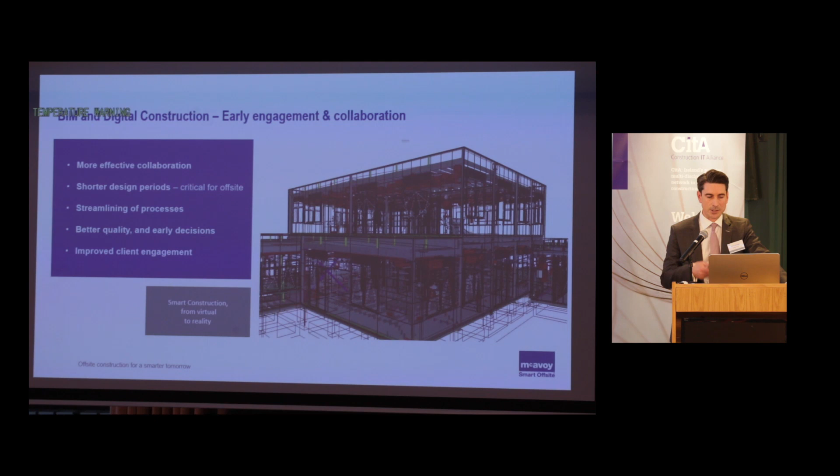Some may see that as a disadvantage. There's a lack of flexibility there. Others may see that as certainty in terms of programme and cost. Streamlining of processes, not only between client and contractor, but also internally within the business in terms of delivering the project quickly and effectively, and improved client engagement. And I'll talk a little bit more about that later on.

So the VR piece, really innovative, really fun. Dag mentioned fun a couple of times in his presentation, and that level of engagement we get with our clients based on VR is invaluable. Especially building schools, where our stakeholders typically are bursars and school principals and heads of trust. They don't understand 2D drawings.

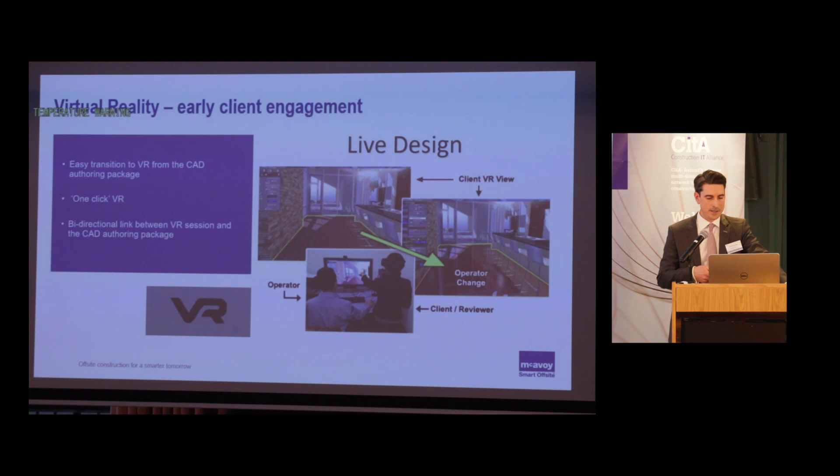So the 3D VR allows a real interactive, totally immersive experience and helps people to visualize the buildings that we're going to build for them. We've experimented in a number of ways, beyond just having a VR hub in the factory where people come and put the headset on. We're looking at it from a practical point of view and also from a project delivery point of view.

So we've trialled this multi-user VR on a particular scheme recently, a large school project in London, where all of the stakeholders, all of the actors, rather than us putting bunches of people on planes every Monday morning and flying design teams and project teams over and back through the detailed design stage, we can do it from a virtual environment where all of the actors have their headsets on and we can make real-time design changes to the project.

We use it for staff training. We do a lot of inherently risky processes in terms of our manufacturing, lifting heavy components and pieces of steel and shipping and logistics and so on. So we can do a lot of this training using VR, which again is a fun thing.

This is very exciting. This is the next stage, taking VR and BIM to the next level from a production point of view. Again, Dag mentioned it with the, I don't know what photographers are going to do in the future when the classic PR photograph was somebody holding a big A1 drawing and pointing at a line drawing. Now it's iPads and you've already shown that. So this augmented reality is going to become more prevalent in our business.

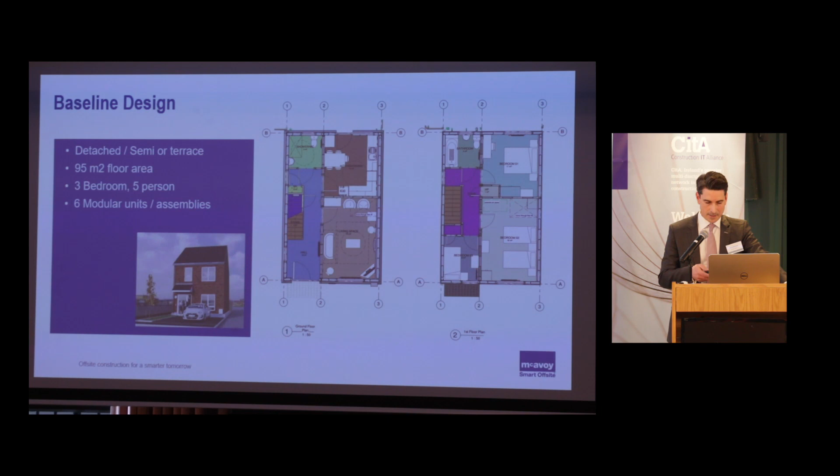So there's the model of the light gauge steel frame structure. That's it when it came into the factory. Dermot Healy from Curtins saw this firsthand, shook his head and a sharp intake of breath and said, "That's over-designed." And he was right, because it was a prototype. We have since, you'd be pleased to know, rationalised that a little bit, taken some cost out of it and innovated the system. So currently it comes in from the UK on the left-hand side as a pack, and we then erect it like so.

The investment in the new factory in England, which I referenced earlier on, we will roll our own. We will have cutting, and we will have beds, we will have systems where the galvanised steel will come in, and we will roll our own, just to, again, straight to line. There's the prototype in the factory, kind of a surreal experience at the time, walking around it when there's 150 men doing their work outside. But again, certification, light gauge steel frame, because that's what we do. So we use BIM clearly to develop the design for the prototype, help us to engage with the client, and to make changes to the layout quickly and simply.

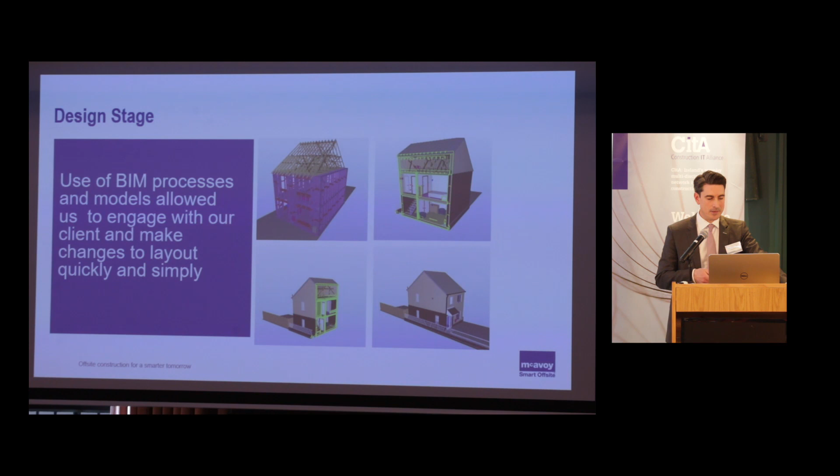The physical prototype actually acts as a great advertisement. It's something we'll more than likely put in the Irish Innovation Park if we get there, and I'm confident that we will. We've redefined the term moving house because that prototype has actually been moved 4 times. It's been moved twice in the factory, went to the site for the PR for Clanmil, and it now has its not quite final resting place in our Lisburn factory, because I hope to sell it at some stage. But I think Alan and Barry can testify that you wouldn't know that it had been moved 4 times. And it is a distinctly underwhelming experience, I have to say.

Anybody's very welcome to come up and have a look at this. I have a key. The weekend's party I had has all been cleared up.

But as I say, it's underwhelming because people, they don't know what to expect. The words prefab and modular, 2 words we've taken out of our lexicon, I might add. We talk about offsite construction. We've trade registered the word smart offsite because the words modular and prefab have such negative connotations, and I'm going straight to HR, Sean, to ask them to put an ad out for an offsite psychologist or whatever that role is. He'll be worth his weight in gold. Yeah, look, it looks like a house, it feels like a house, and it sounds like a house because it's a house.

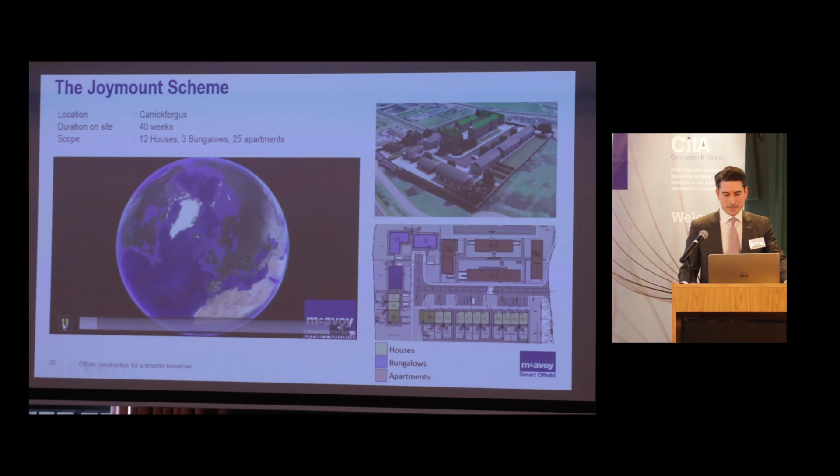So anybody who's been to Carrickfergus, it's a lovely place geographically. It has its social problems. We're hoping that this will help to mitigate some of those. So you're not far away from a 1,000-year-old Norman castle there. You're right on Belfast Lough. It's prime real estate. Unfortunately, it wasn't that prime when we started digging holes in the ground. It was full of asbestos, but that's the world in which we live.

This is a piece by BBC Newsline.

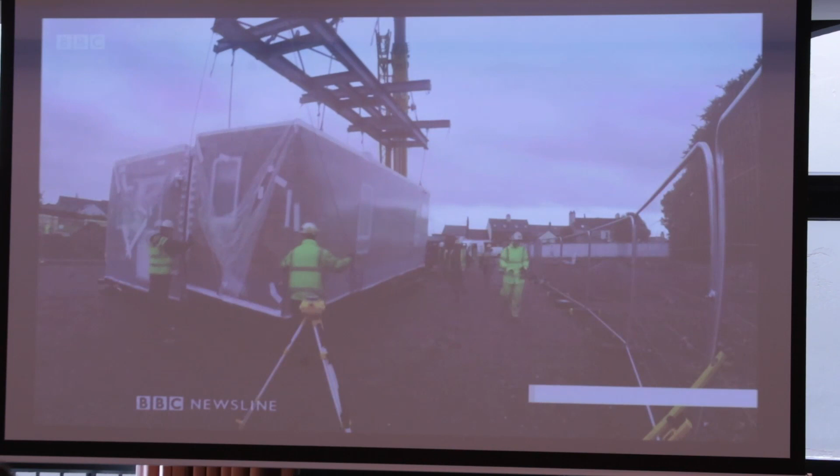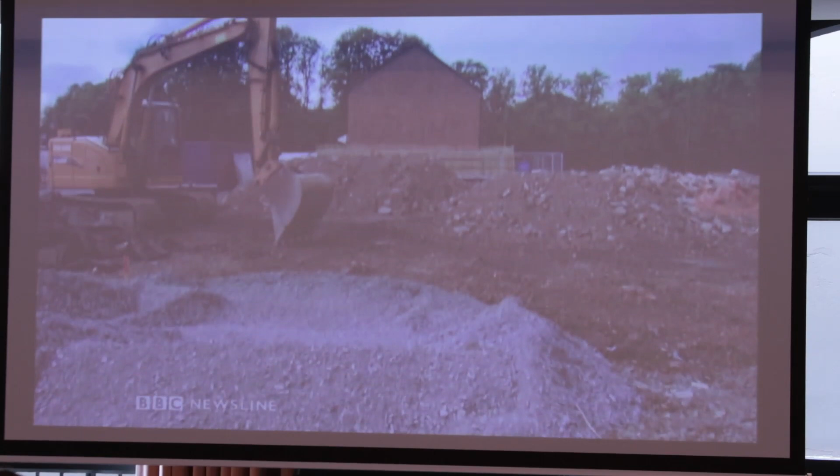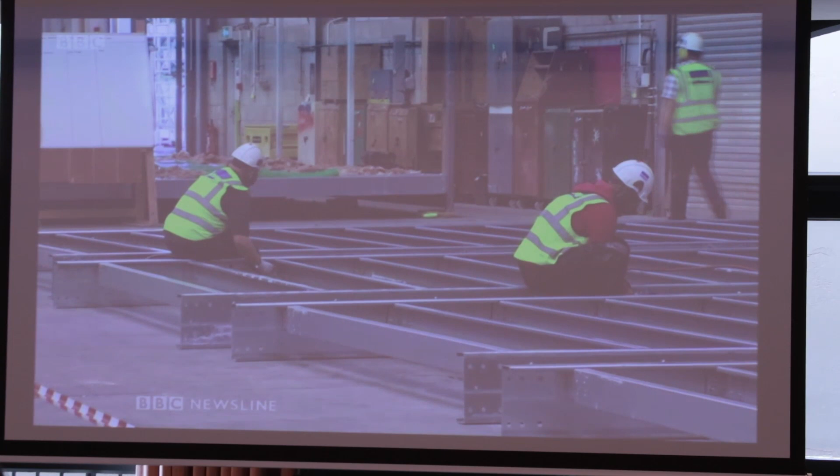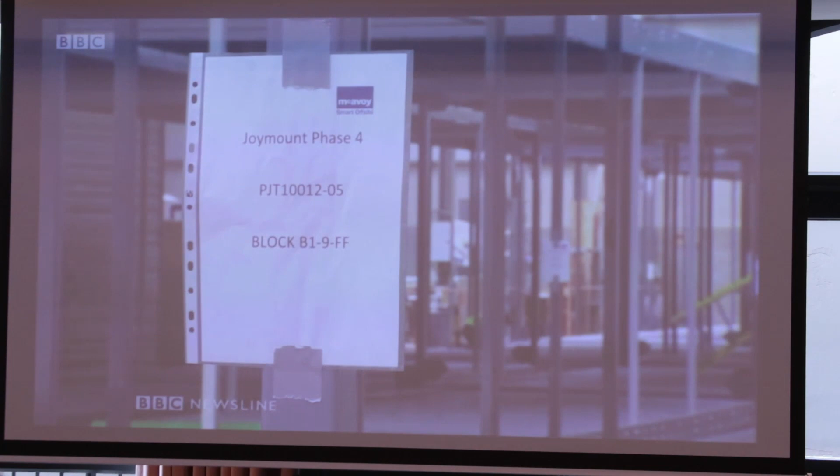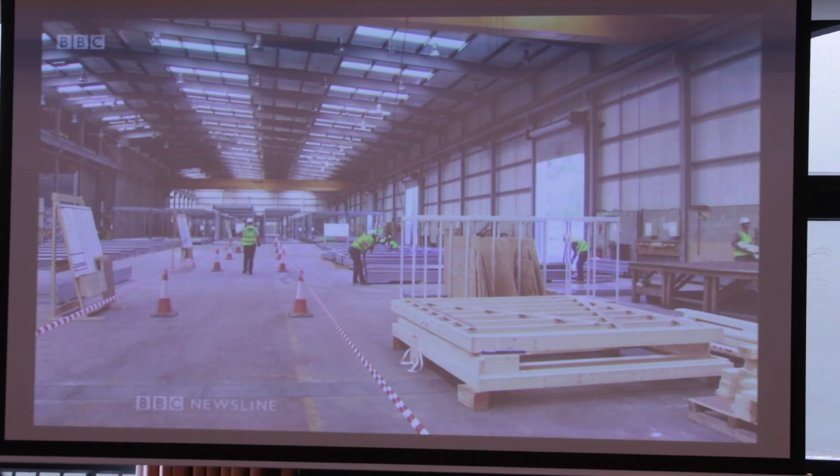Some housing organisations in Britain already do things this way and see speed of delivery as key to addressing growing demands for rental housing. We have a major housing crisis. If we're ever to meet that and fill the gap, we're going to have to build much more quickly than we're doing. And modular is going to be absolutely essential for that. The company making the houses already uses similar techniques in the commercial sector. Our houses are built to the same building regulations and legal requirements as any house built, what you might call traditional or on-site. The project will take months to do instead of well over a year, and once the site is prepared and the houses manufactured, they can be assembled in a day. This is not a new way of building things, but it is a novel approach when it comes to social housing in Northern Ireland. Ultimately, this project will deliver 40 new homes in about 9 months' time, twice as quick as if they had been built the old-fashioned way. Julian O'Neill, BBC Newsline, Carrickfergus.

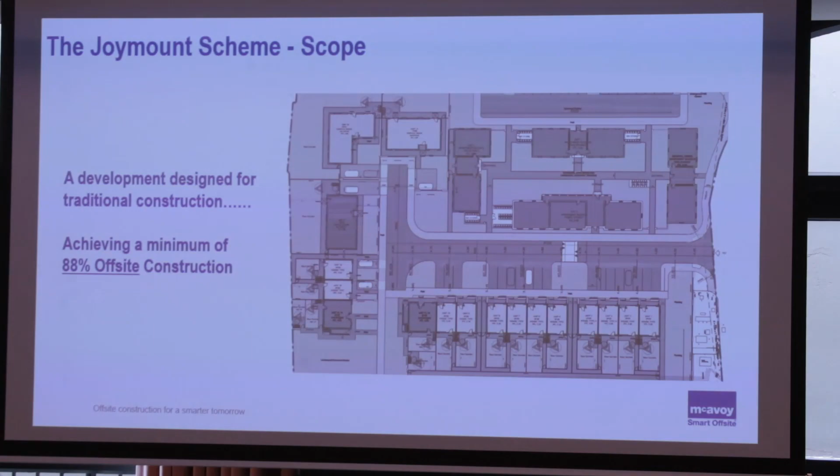I think Clanmill need to hire our PR consultant, because whilst that was Clanmill's piece, they didn't get an awful lot of it. We got a lot of subliminal branding there. But a really objective piece, I should say, and it generated an awful lot of interest. And I think what it did for us as a business was help define who our customer base actually is, or we would like it to be. We've got a lot of small developers with 20, 30, 40 units coming to the door asking, how cheap is it? That was the only thing they were interested in.

And when we extrapolated out that scenario to say, right, fine, you like the product, you like the price, I build them all for you in 4 months and you pay for them all. Well, how does that sit? Well, we only build and sell one a week. So it didn't work for them financially. So the proposition has to be right. The market requirement is different depending on the subsector. So volume is key for the industry. Standardisation is key. Are housing associations right? Again, procurement is also one of the fundamental things we need to consider.

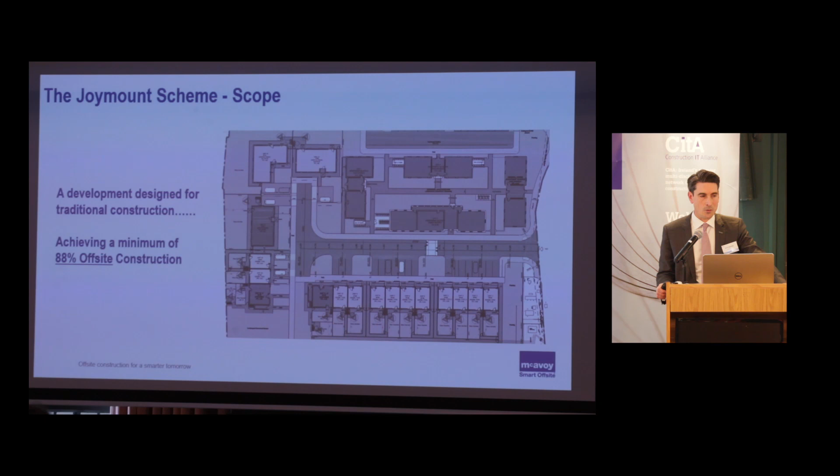If we talk a little about that Clanmill process, we tendered it. We were 20% more expensive than the traditional contractor, but we knew that the outturn costs were never the tender costs in normal procurement of social houses in Northern Ireland. Clanmill recognised that because anecdotally they had just awarded a contractor a price based on his lowest price, a race to the bottom, and within 3 months they had 127 compensation events on their desk. So that's just not conducive to working collaboratively, and surely not good value for the public purse.

Clanmill: initially we thought 88% offsite, light gauge steel frame, and we thought the balance would be reinforced concrete, because it's circulation within apartments. But we've since innovated, and the whole thing is now offsite.

So a little bit about what won it for us, if you like. Compare the two processes, traditional versus offsite. Design's the same. There's no advantage in terms of design, because we still need to employ all the same experts, acoustic and fire and structural and architectural. That detailed design work is incredibly important, clearly, because we need to hit the ground running, get the materials ordered for the factory and start manufacturing.

This is where the benefit really kicks in, because we can do a lot of things simultaneously. So site works are happening at the same time as we're building. We can then phase the deliveries and overlap a number of key tasks, which delivers us a 60% time saving in terms of the overall project. So that was what was very appealing to Clanmill. Not only would they realise revenue much earlier in the cycle than traditional, but they were also ticking one of their social charters, which was getting people into new homes.

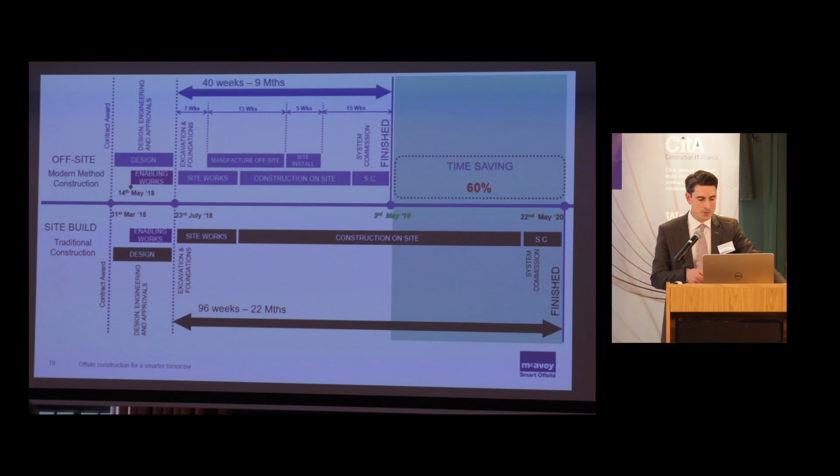So using the same system, the same light gauge steel frame 2-block system, and we're at the early stages of this, developing standardisation, a common platform, to use the BMW parlance, the CLAR system, where 80% of the components in a 1 Series are exactly the same as they are in a 7 Series. So we have a long way to go, but the process is starting. It's the only way our industry is going to be able to deliver and continue to reduce costs.

I think the general comment is that it's too expensive still currently, and there is a bit of a premium to pay. And it's incumbent on us as an industry, because I think the capacity is not quite there yet, to increase capacity, increase investment in capital and buildings and investment in technology in order to widen the options for purchase.

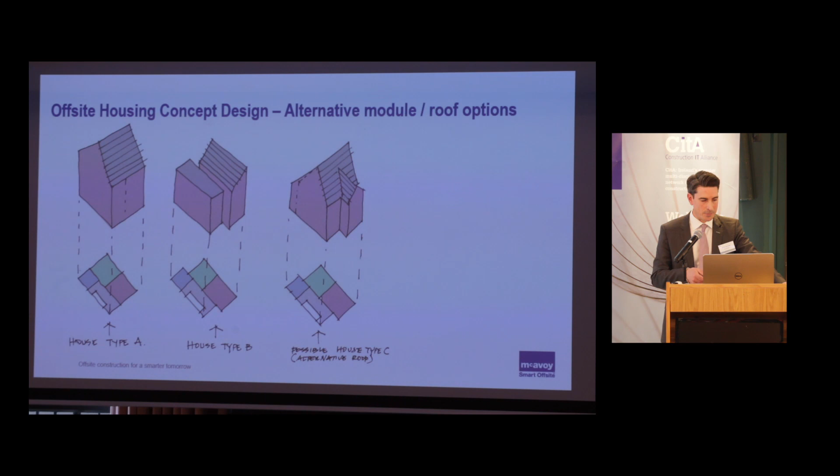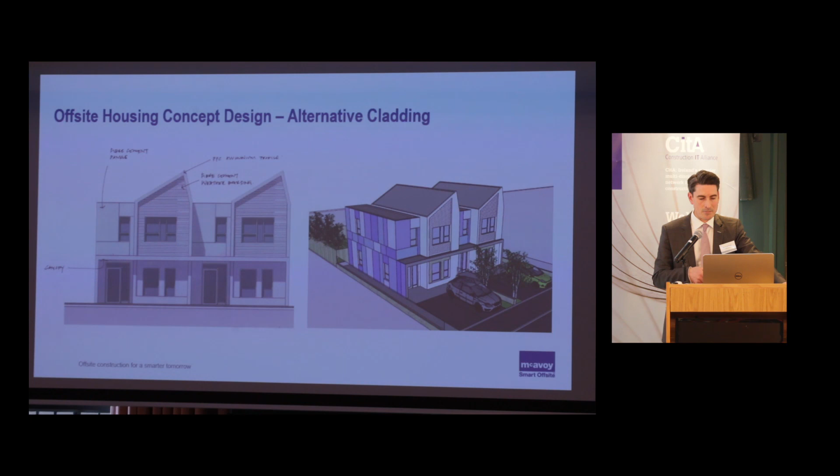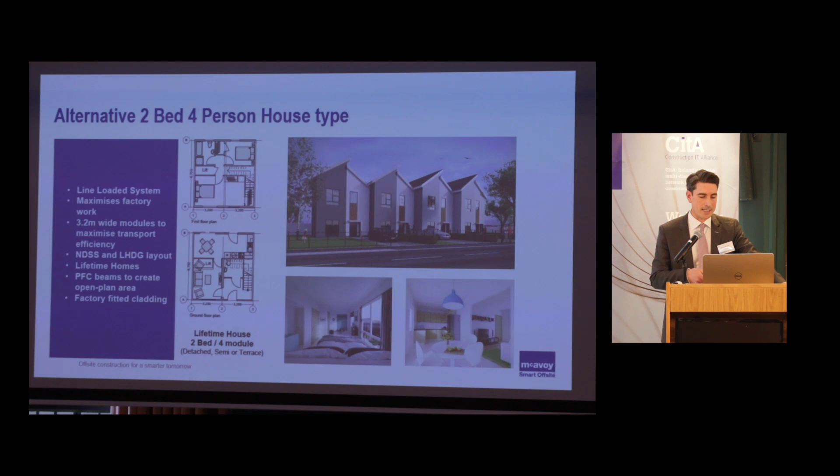So here's a number of different concept designs. Again, all using the same DNA, can look very contemporary, change the elevations, change the roof type, change the design, and you get some markedly different types of buildings. 2-bed and 3-bed, again, same system, just slightly reduced in size. We're working currently up to 18 metres for one type of system. Then obviously the new regulations, non-combustible materials above 18 metres, take us up to above 7 stories. Again, that's another system that we're currently developing in terms of design.

Mid-rise apartments. I think in Dublin the general appetite is for much larger scale build to rent and PRS, and that's where we see the opportunity for offsite really delivering some value. But again, the challenge is scaling up and having the capacity to deliver, because you've got the procurement paradox, where you've got the client saying, I need assurance of supply, and then us on the other side going, we need assurance of demand. How do you get those two to trust one another and to talk together and to actually come up with a plan to deliver? So capacity is the issue.

I know one particular developer has nearly 13,000 units in his pipeline, and construction inflation in Dublin is currently 7% a year. You cannot get trades, and clearly in principle offsite works, but it's whether or not practically and from a capacity point of view we can actually deliver to those levels of expectation. Again, working on the standardisation of systems and components, repetition floor after floor after floor. Dermot Healy's done a lot of good work on this for Dublin City Council, where he understood the importance of that repetition floor by floor, so that we're not spending additional monies on hot rolled steel and different structural systems.

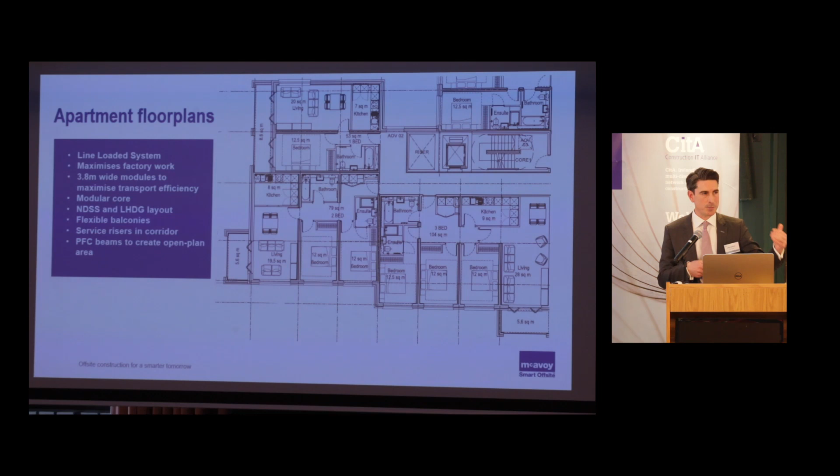So just to finish then, the benefits of the offsite solution: increased collaboration, and it's fundamental, and I'm going to reiterate it again in terms of the maturity and the insight shown by some UK government departments, where they're working collaboratively with us. They're showing us a pipeline, they're helping us to invest in the product in order to gain advantage and in order to deliver them more schools on time.

Standardisation is key. We're less dependent on site skills, which we've mentioned. Improved quality. It's a factory controlled process. It's highly engineered. The operatives are highly skilled. Clearly health and safety benefits. Improved logistics, less deliveries, therefore having a positive impact on carbon emissions. Cost certainty and programme certainty, two of the key drivers for most clients. You'll get it when we say you're going to get it, and it's going to cost what we said it was going to cost at the outset. Reduced programme and a quicker return on investment.